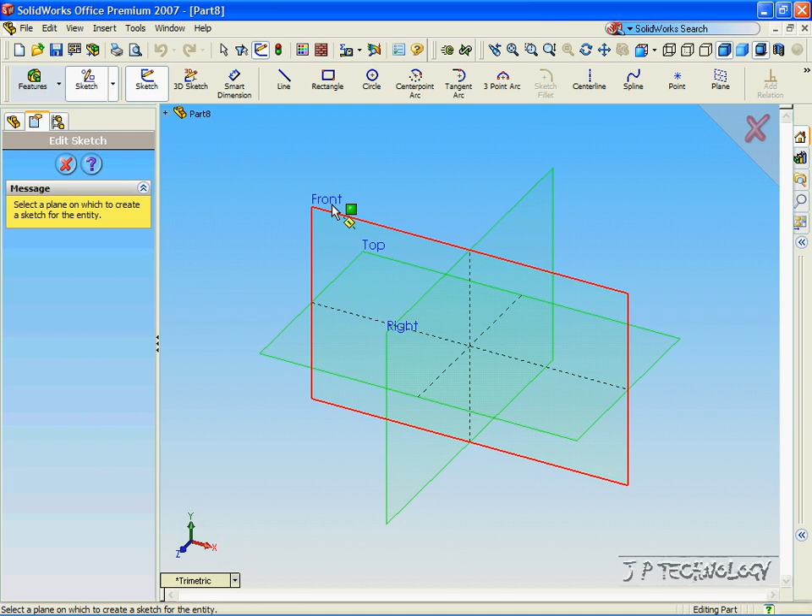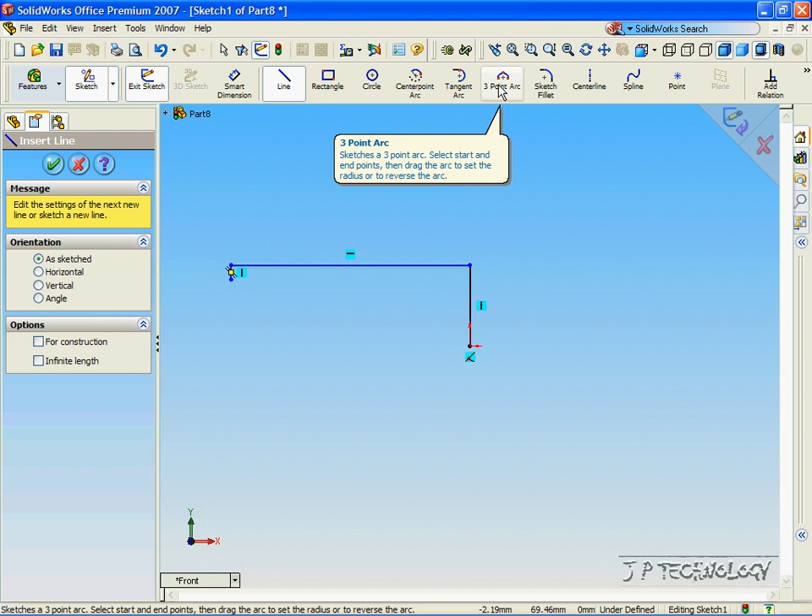Click Line, click Front. Now, for this first bit, let's draw a pulley. Draw a line straight up, draw a line straight across, down. Now right click, click End Chain, click 3-point arc, click on the dot, click in a straight line with that dot.

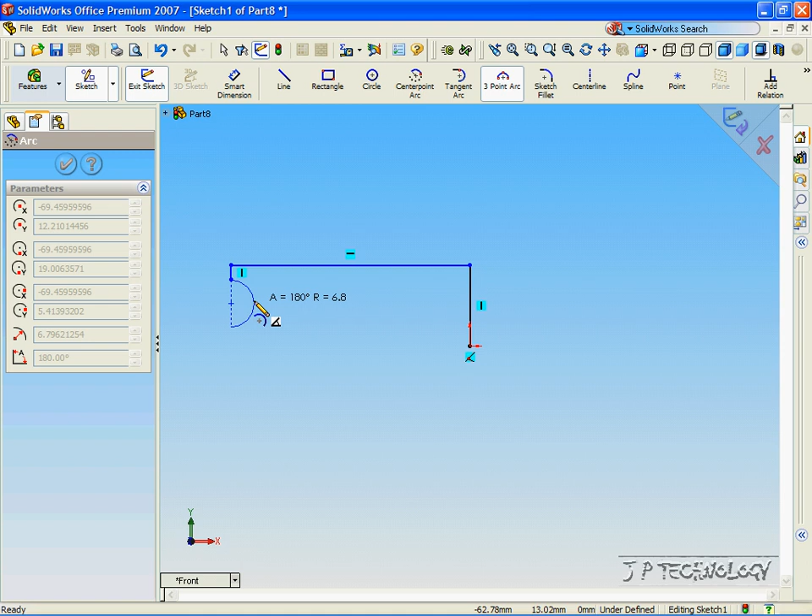Now you can pull it back, you can pull it forward, and that judges how much of a curve. For this one, let's make it 180 degrees. So once you get it there, click. Now click Line, click down until you see the dotted blue line, so you're in line with the origin, and go across and click the origin.

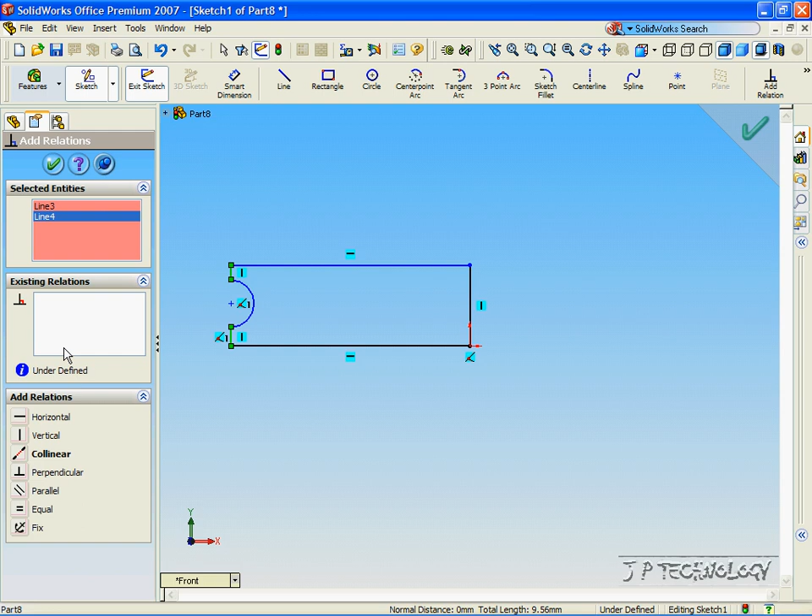Click OK. Click Add Relation. Click that line and that line there, and click Equal, so now they're equal length, and click OK. Now, to revolve this to make a pulley wheel, click Feature, click Revolved Boss/Base.

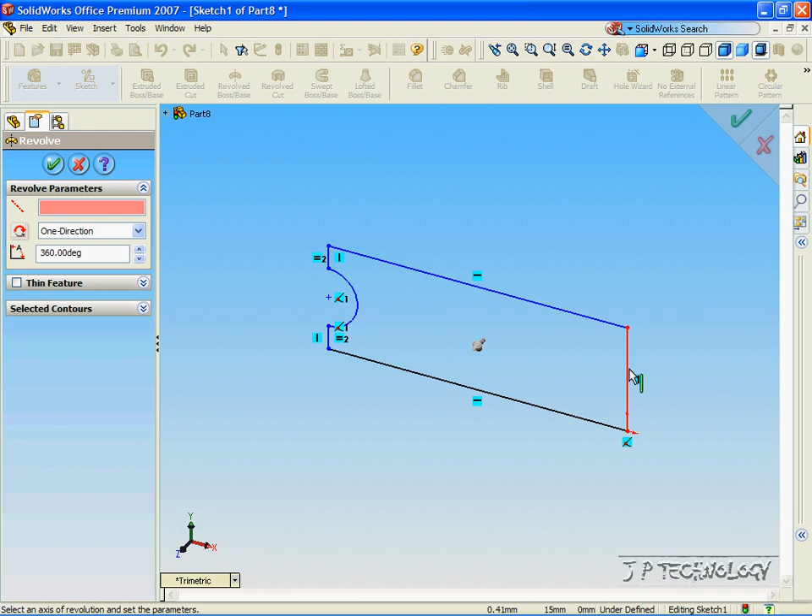Now, this feature here is the axis of revolution. This is where the whole object is going to be spun around. On this particular object, it's going to be this line right here. But in some cases, we're going to have to draw in a temporary axis. For this one, we just click this one, and it revolves around that line.

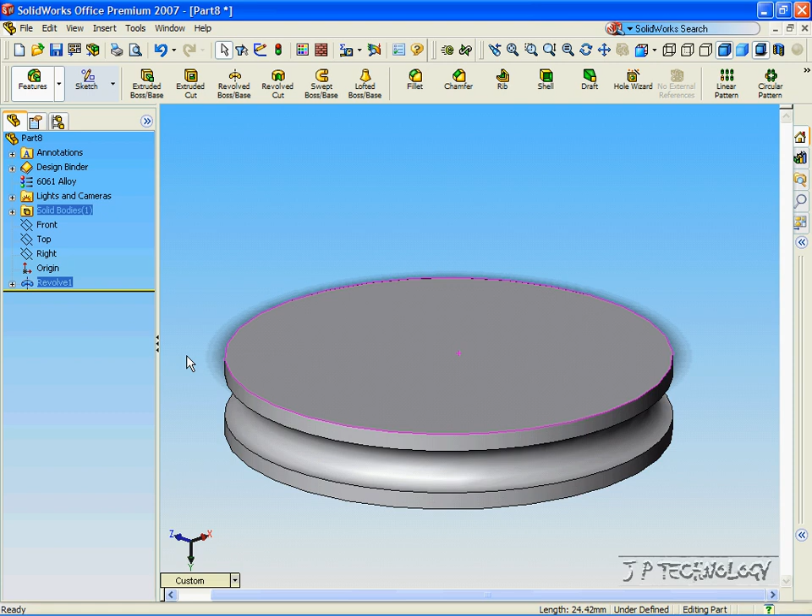Now let's take a look at our preview, and it looks pretty good. Click Isometric, click OK, and now we've made a basic pulley wheel. Now click File, click New, click Part, click OK.

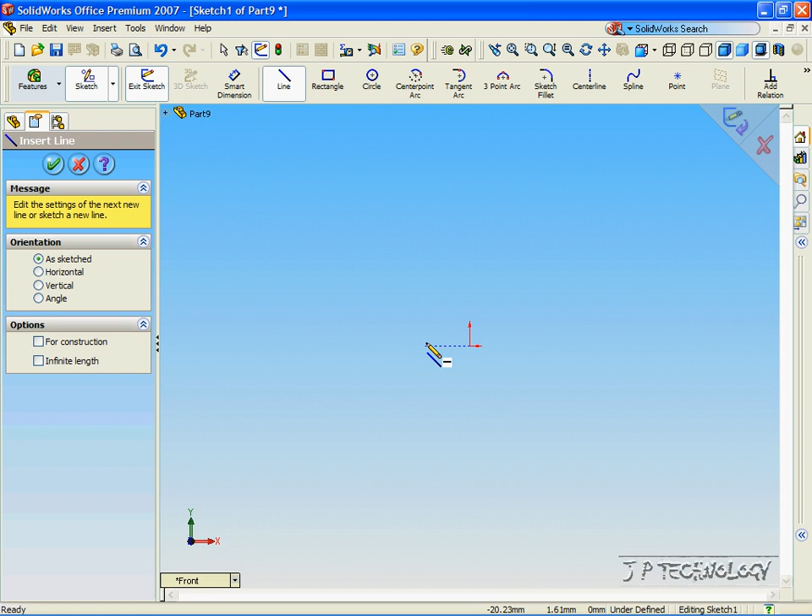Now we're going to make a part that we need to make a temporary axis. So click Sketch, click Line, click the front plane, and this time, instead of right on the origin, let's go to the left a bit, and let's draw something. For this, let's just doodle and make a funky looking shape.

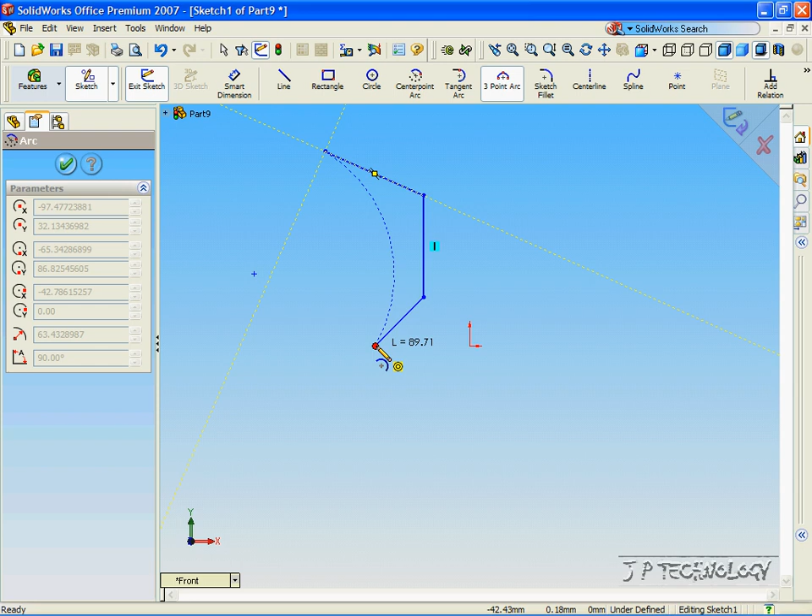All that you have to do is just make sure that you complete it. Make sure that it is enclosed. So there's my shape. Click OK. Now once you've made whatever shape you want it to be on the left, click Center Line.

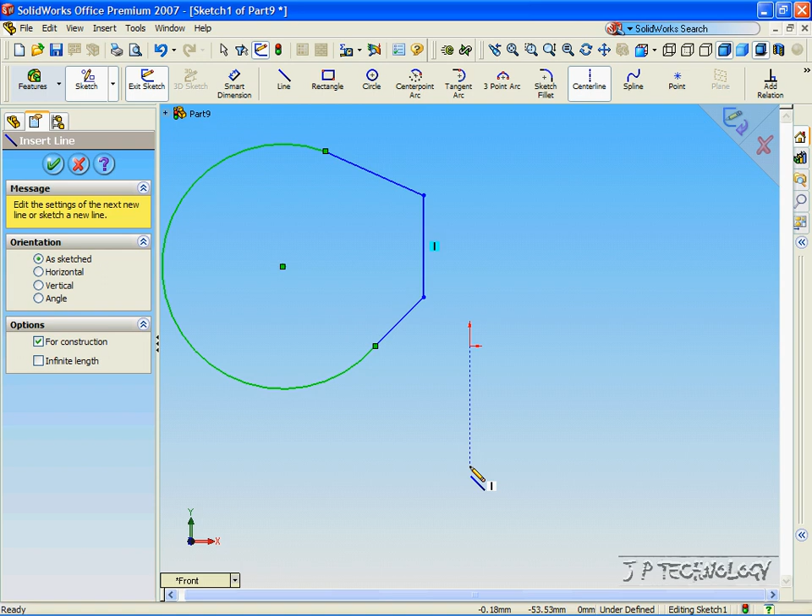From the origin, go down until you're below your drawing and in line with the center line with the origin. Go straight up until you're past it, and click again. Now click OK. Now that's going to be our axis of revolution.

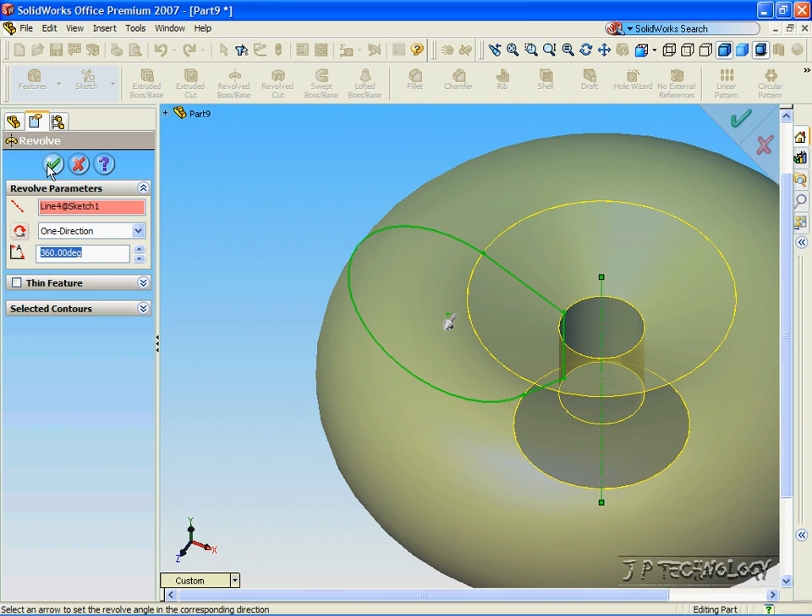Now click Feature, click Revolved Boss/Base, and it revolves around that axis of revolution, our temporary axis, and you can see we have a hole in the middle now. And this appears to be a donut. Now click OK. And we have our drawing.

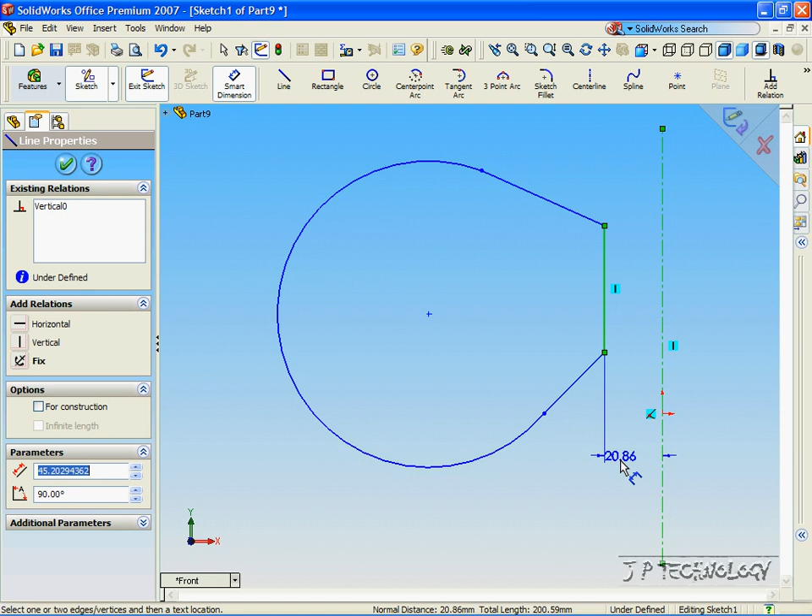Now say that hole in the middle was too small for us. To make it a bit bigger, we would right click, Edit Sketch, click Front. Now to make the hole bigger, we need the distance between here and here larger. So let's click Smart Dimension, click the axis, click the line, and let's say 100 millimeters. Click Enter, click OK.

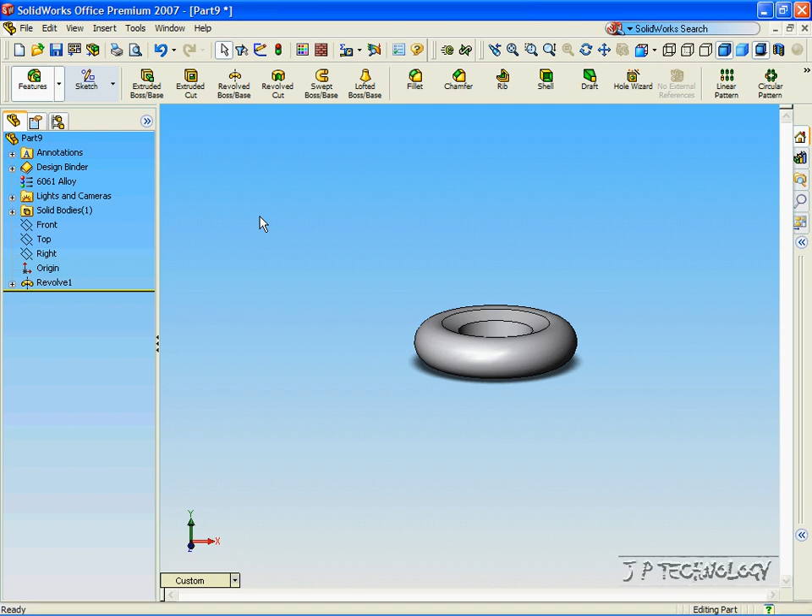Now we've made the hole in the middle bigger. So we are able to still edit the revolve just through the drawing. Now let's make a unique 90-degree corner bend. Let's click File, click New, click Part, click OK.

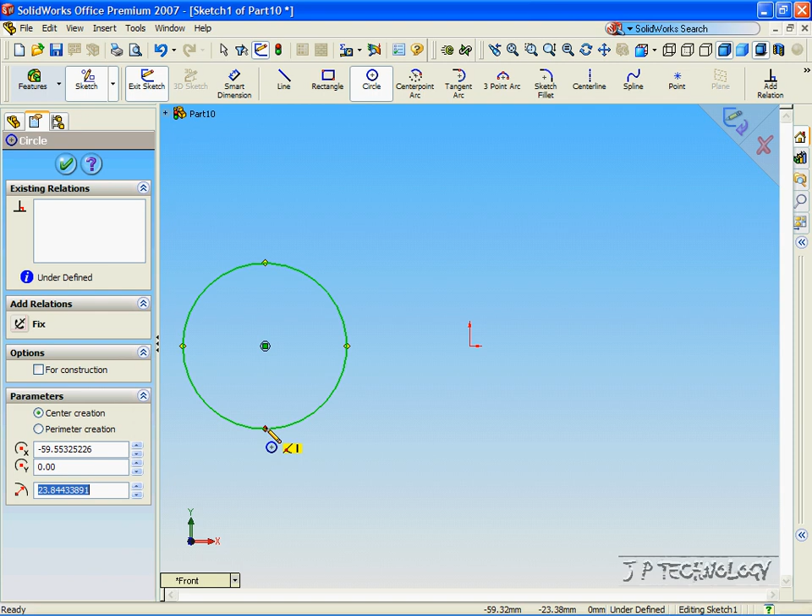Now let's sketch a circle on the front plane, and again, not on the origin, to the left of it. And let's make the radius 25 millimeters. Click Enter, click OK, and let's draw the center line again in line with the origin all the way up.

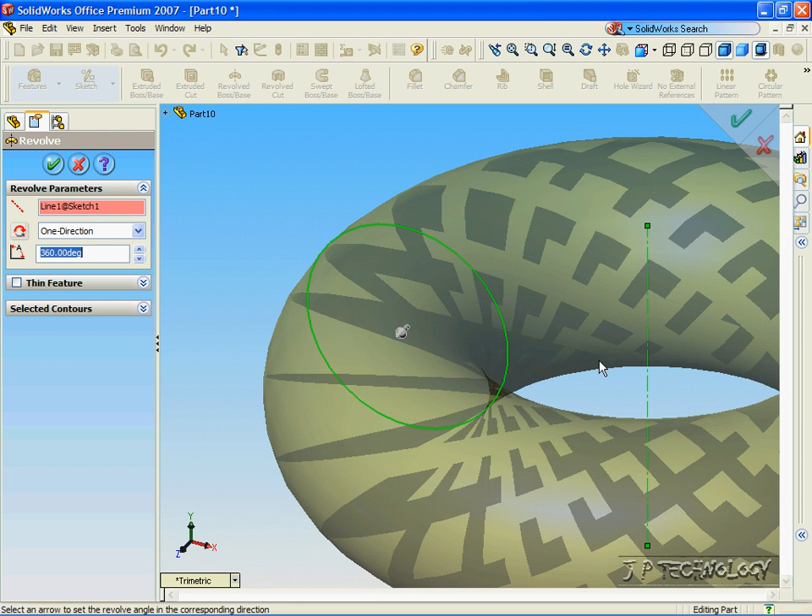Click Enter, click OK. Now to revolve it, once again we click Feature, Revolved Base, and it revolves around that axis. Instead of making a total 360 degrees, this time let's make it 90. Now we only have a section of it. It only revolves 90 degrees around our axis. So now we have like a corner bend, a corner pipe, whatever you want it to be.

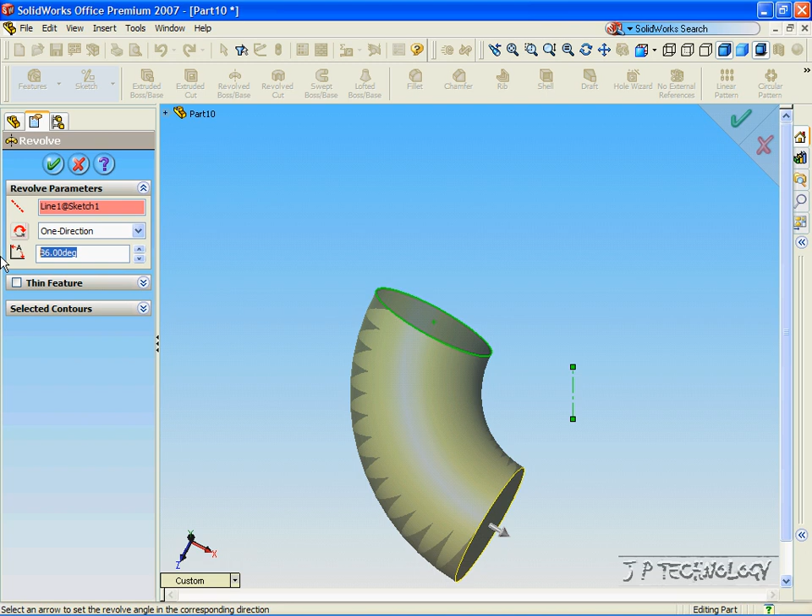Now again, with the degrees you can increase it and it makes more of a bend, decrease it, it makes less of a bend going around. But for this one, let's just make it 90 degrees. Click Enter, click OK. Let's click the isometric view, and we have a 90-degree turn.

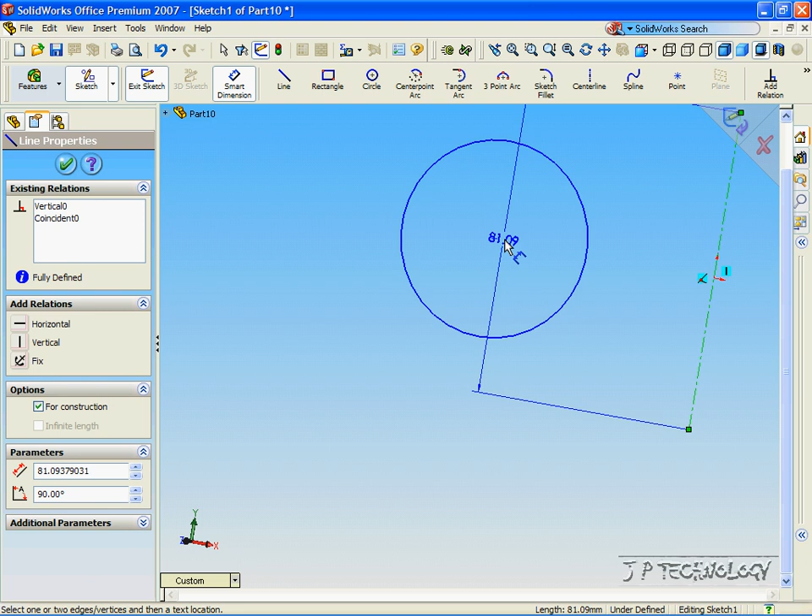And again with this one, if we want to make the bend bigger, we can edit the sketch with a smart dimension, the distance from the centerline to the center of the circle. Let's make it 100. Click Enter, click OK, click OK, and now the curve is bigger. And this concludes our tutorial on the revolved boss/base.